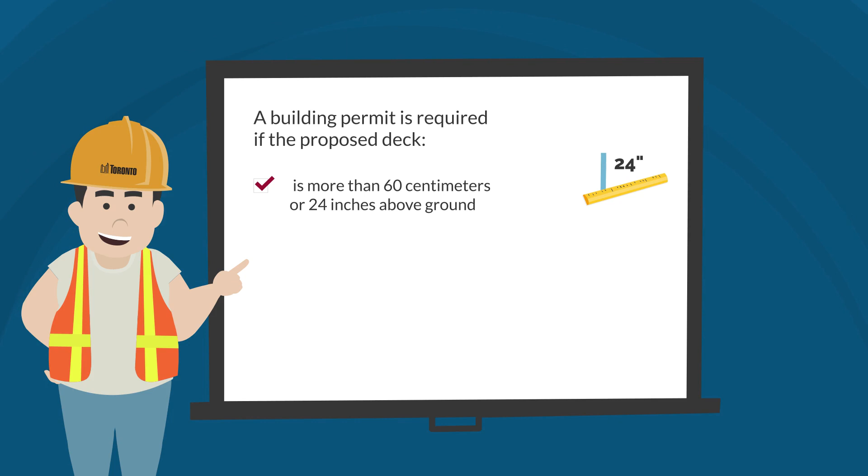When do you need a permit to build a deck? A building permit is required if the proposed deck is more than 60 centimeters or 24 inches above ground, serves as a principal entrance of a home, or forms part of a building exit required under the Ontario Building Code.

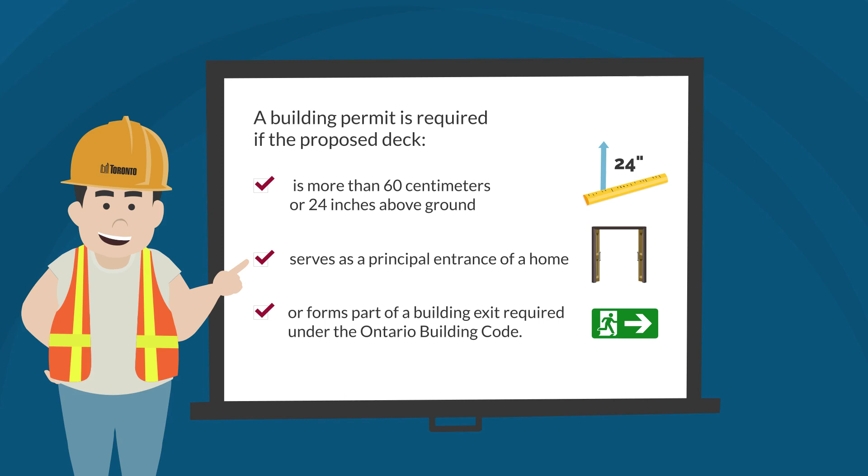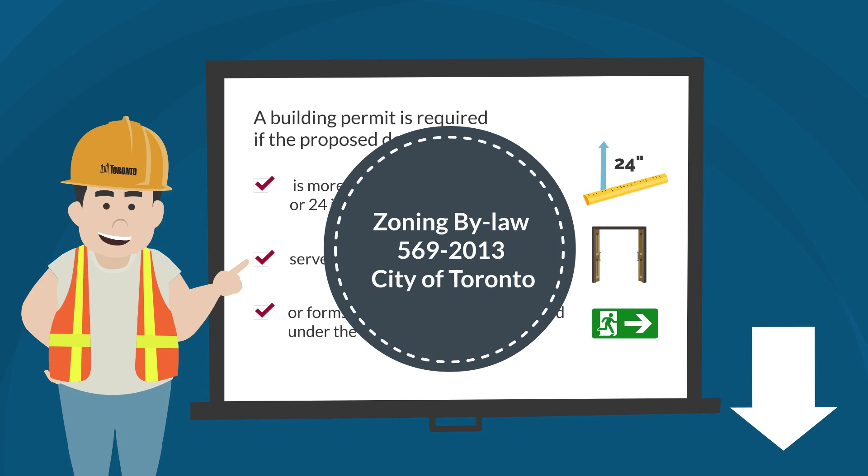It's important to note that the construction of a deck needs to comply with zoning requirements even when a building permit is not required. A link to Zoning Bylaw 569-2013 on the city's website is included below.

Applying for a building permit? You need the following forms when applying for a building permit: Application for a permit to construct or demolish, Schedule 1 Designer Information, and Tree Declaration.

The first form to complete is the application for a permit to construct or demolish. It needs to be completed fully and signed by the applicant.

The next is the Schedule 1 Designer Information form. This form is required when the deck is designed by someone other than an engineer or architect.

Next is the Tree Declaration form. This form is always required when building a deck, even when there are no trees being affected by the construction.

In addition to completion of the Tree Declaration form, the applicant is also responsible to comply with other applicable tree protection bylaws explained on the city website at toronto.ca/trees, and select Tree and Ravine Protection, then Permit and Tree Protection.

A link to all required forms can be found in the video description below. In addition to the forms, you will also need to provide the following plans or drawings: a site plan, a survey, and plan and elevation drawings.

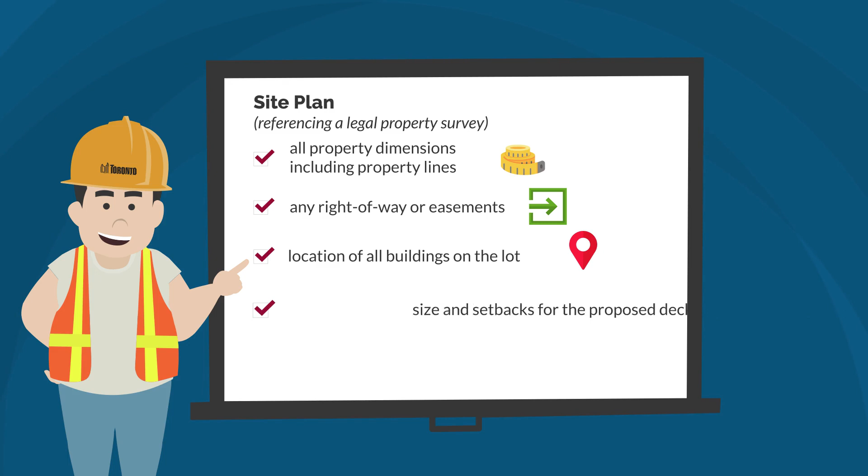What is a site plan or survey? A site plan referencing a legal property survey needs to be provided showing all property dimensions, including property lines, any right-of-way or easements, location of all buildings on the lot, as well as size and setbacks for the proposed deck.

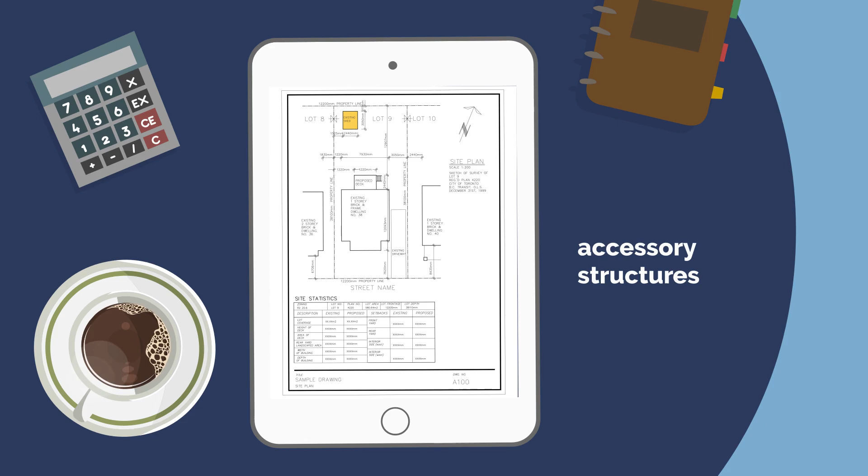Dimensions should also be provided for parking areas, driveways, hard and soft landscape areas, and accessory structures, including sheds, decks, and detached garages. Site statistics should be included on the site plan.

A summary of existing and proposed site statistics should be provided to include lot area and lot coverage, areas of all buildings on the lot.

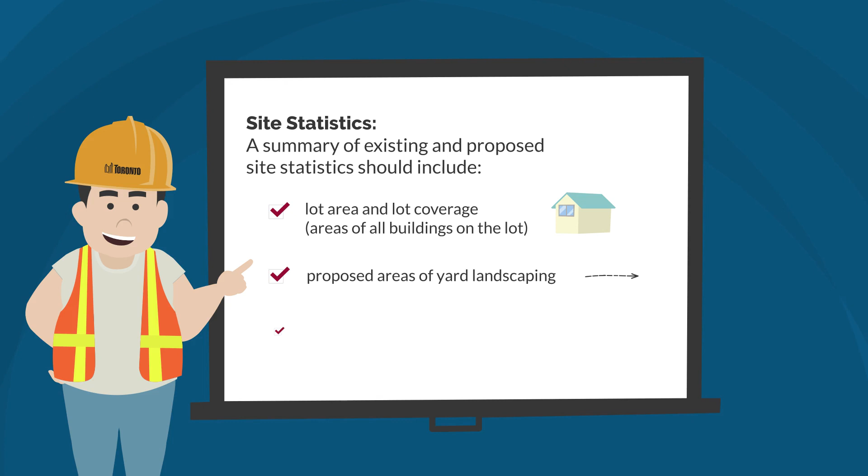Proposed areas of yard landscaping should be clearly indicated, whether it is soft landscaping such as grass or hard landscaping such as interlocking stones.

Survey: A survey is a legal document prepared by a registered land surveyor that shows your property boundaries, structures, and any existing easements. What do we need to include in the plan drawings?

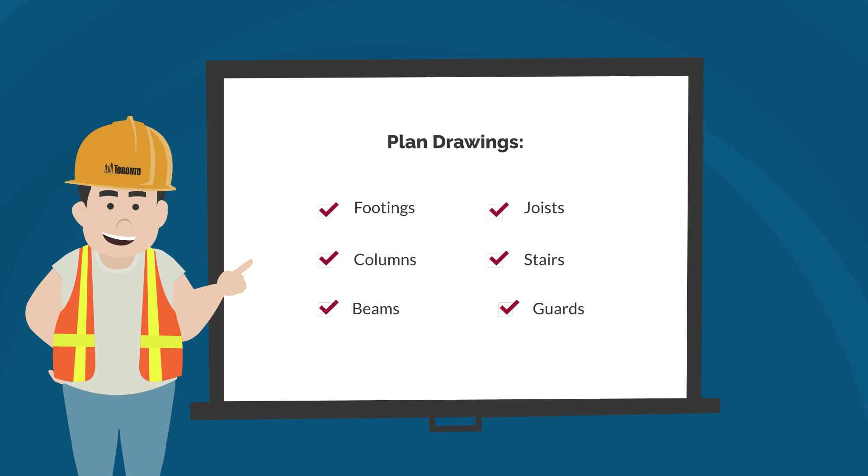Your plan drawings should show details regarding footings, columns, beams, joists, stairs, and guards. For footings, details such as spacing, depth, and height above grade should be clearly indicated. For columns, beams, and joists, details such as size, material, location, span, and spacing should be clearly indicated along with decking material.

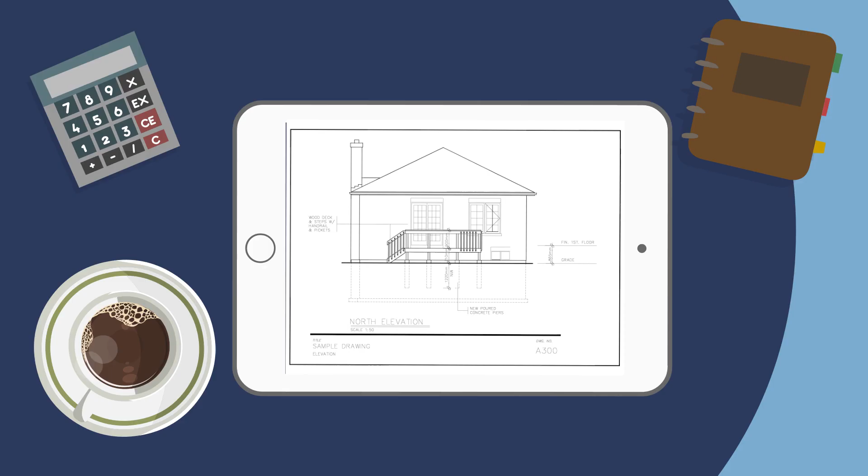And how much detail do we need to include in the elevation drawings? On the elevation drawings, details such as height of the deck, height of the guards, and handrails should be indicated.

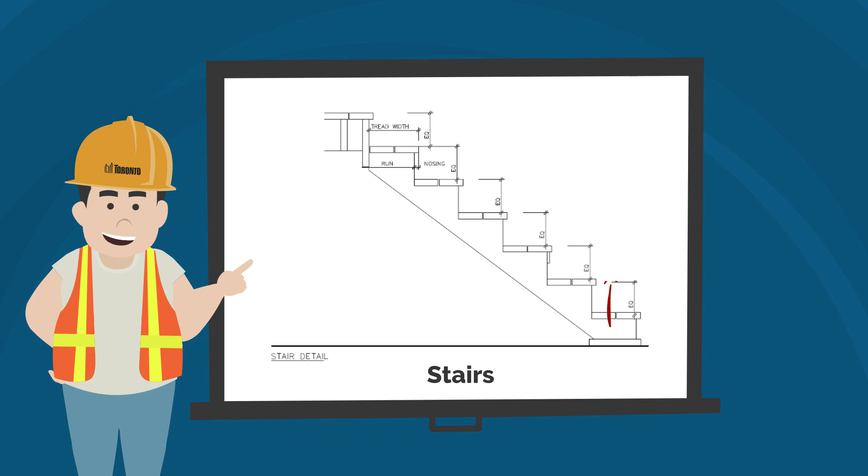The guardrails should be of a design that is not climbable. For stairs, details such as the rise and run dimensions of the steps should be included.

Before you go, let's quickly check off what you will need for your permit application. Permit application checklist: the application for a permit to construct or demolish form, Schedule 1 Designer Information form, Tree Declaration form, site plan or survey, plan drawings, and elevation drawings.

With these items prepared, you are now ready to apply for your deck building permit. For more information, search decks and porches on the city website. A link to this page is included in the video description below.

Disclaimer: All illustrations and dimensions shown in this video are examples only and not indicative of any zoning bylaw or Ontario Building Code requirements. Toronto.ca/building